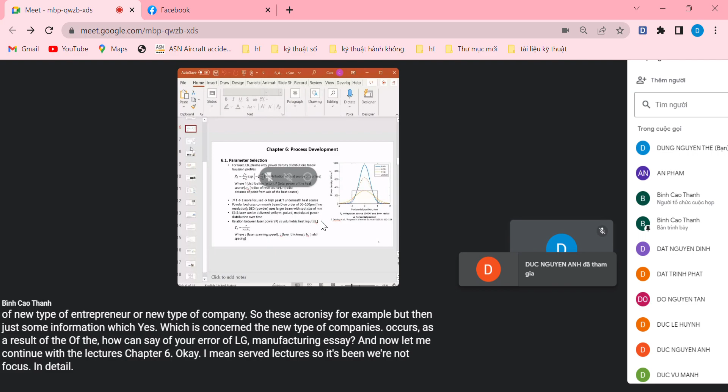Now let me continue with the lectures, chapter 6. I will serve the lecture, so I will not focus in detail. Rather, I will tell you how to investigate the lectures in the most effective way, let's say.

As I remember, last time we stopped more or less here, where we have to consider parameter selection. For example, several parameters associated with the scanning process, like scanning velocity, hatch distance, laser scanning pattern, and layer thickness, among others.

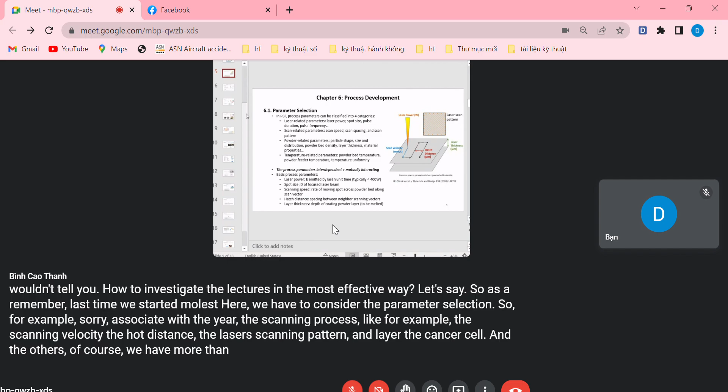Of course, we have more than 180 parameters that need to be considered during the additive manufacturing process. However, among them, the important ones are laser power, spot size, scanning speed, hatch distance, and I would say the most important is layer thickness.

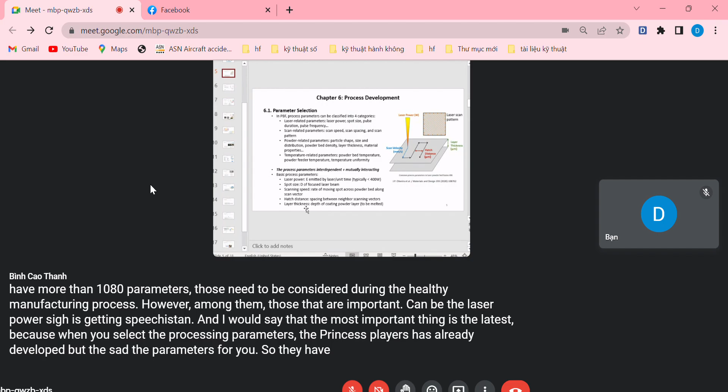Because practically, when you select the processing parameters, the printer suppliers have already developed a set of parameters for you - somehow optimized parameters - and these are defined based on the layer thickness. Unless you want to investigate the set of parameters on your own, it's better to refer to the set suggested by the manufacturer or printer suppliers, which are referenced to the layer thickness.

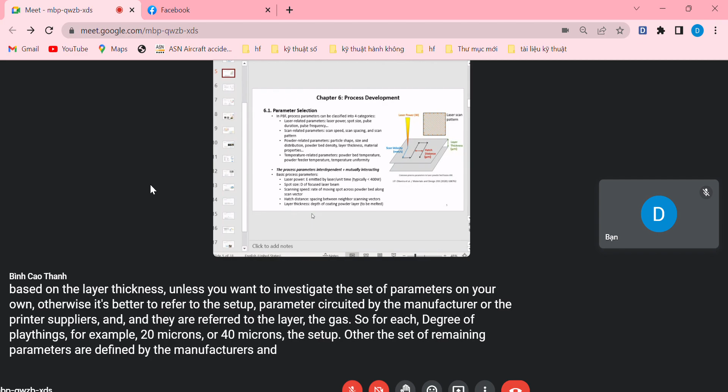So for each degree of layer thickness, for example 20 microns or 40 microns, the set of remaining parameters are defined by the manufacturers, and you should refer to these rather than developing your own, because it's a matter of time, cost, and effort for the researchers and the company as well.

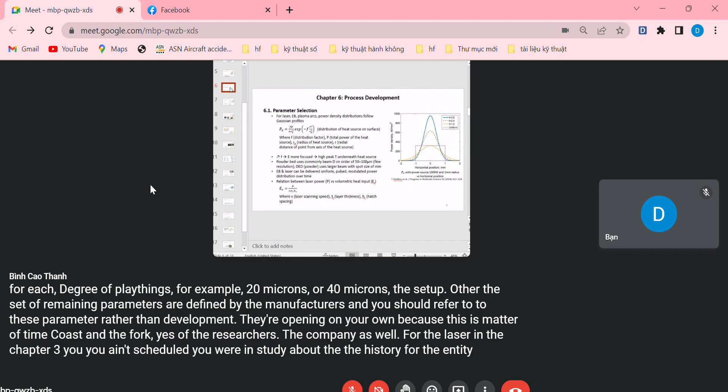For the laser, in chapter 3 you were introduced to the heat source for additive manufacturing, especially needed when you use direct energy deposition or powder bed fusion, where you use the laser, electron beam, or plasma arc as heat sources. You have the equation, and I believe we also investigated the equation to a certain extent.

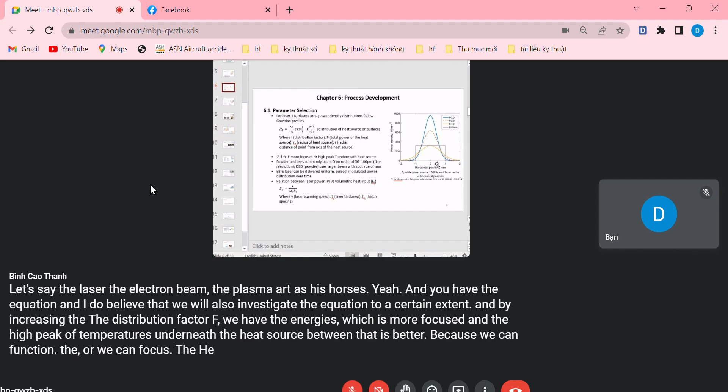By increasing the distribution factor F, we have energy that is more focused with a high peak of temperature underneath the heat source. This is better because we can concentrate or focus the heat source to a small spot size and heat up the material to the molten state, giving us the molten pool.

But if the energy is transferred to the materials insufficiently, in that case you will have some type of defect, which will be mentioned in the next few slides.

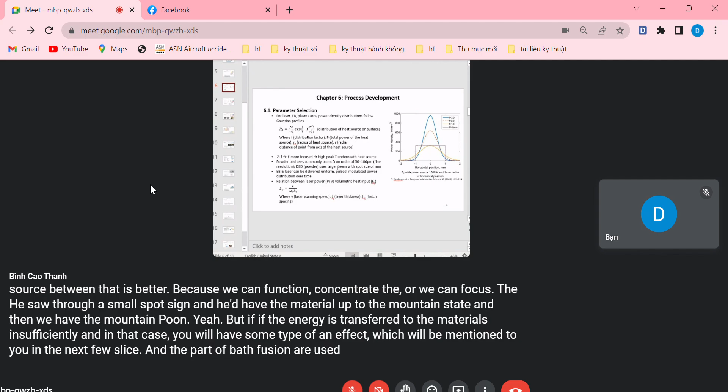Powder bed fusion uses a common beam diameter on the order of 50 to 100 microns - this is considered fine resolution. Direct energy deposition uses a larger beam, so it's faster, but with a faster process you would have poorer quality, at least referring to surface roughness.

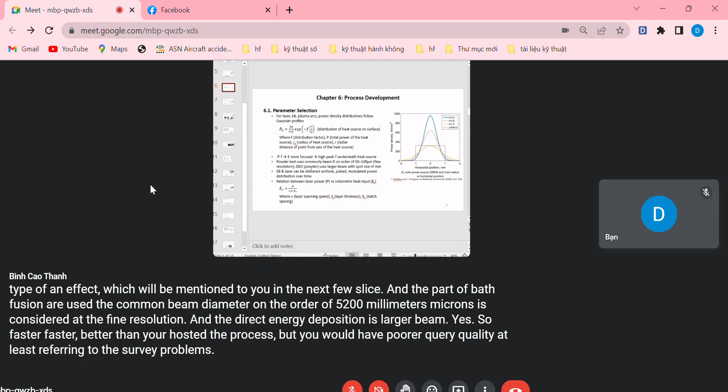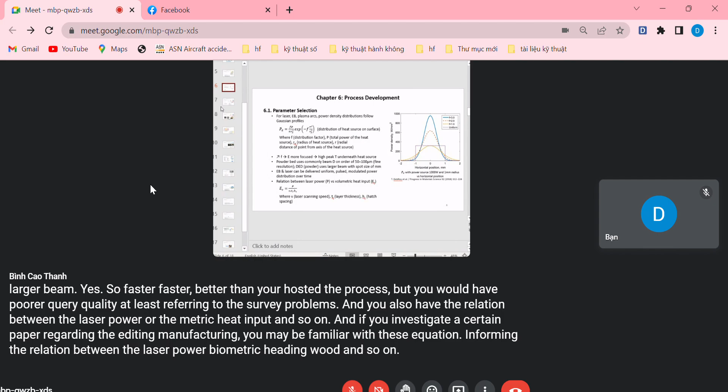You also have the relation between the laser power, volumetric heat input, and so on. If you investigate a certain paper regarding additive manufacturing, you may be familiar with this equation informing the relation between the laser power, volumetric heat input, and so on. It can help you somewhat in understanding the appropriate parameter selections.

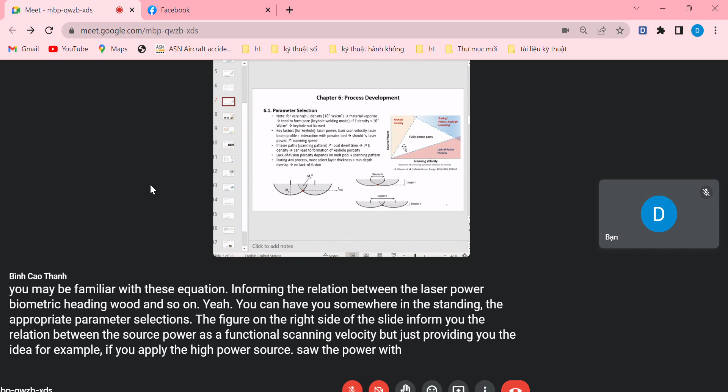The figure on the right side of the slide informs you of the relation between the source power as a function of scanning velocity, just providing you the idea of, for example, if you apply a high power source with low scanning velocity, what type of effect you would expect to have. So for sure, you need an appropriate combination of the source power and the scanning velocity in order to receive a fully dense parts. That's what we would like to have and to do.

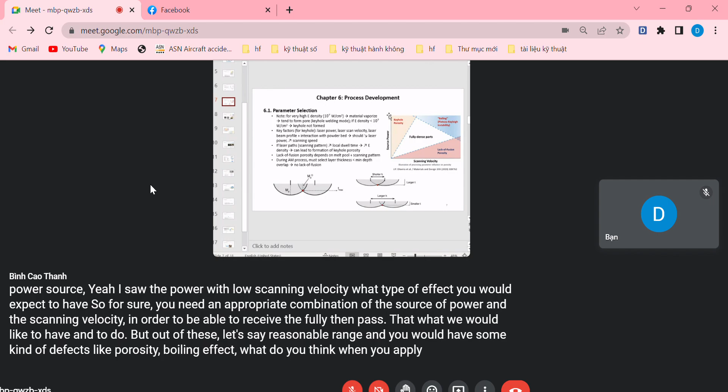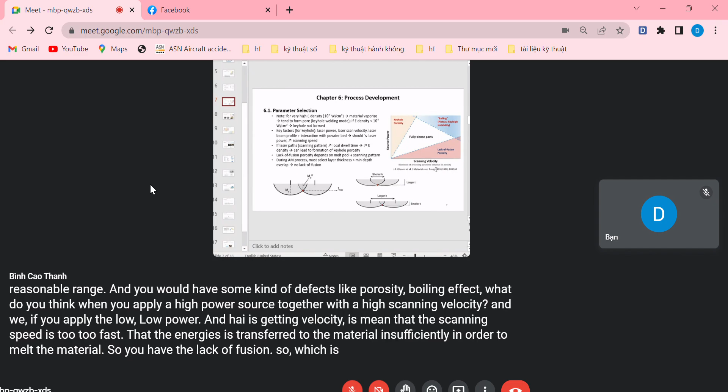But outside this reasonable range, you would have some kind of defects like porosity, balling effect. Balling effect occurs when you apply a high power source together with a high scanning velocity. And if you apply low power and high scanning velocity, it means that the scanning speed is too fast, so that energy is transferred to the material insufficiently to melt it. So you have lack of fusion, which is fused not enough, and you have a lot of porosity between the powders.

The powders do not melt completely. Imagine that the powders are in a spherical shape, and even when you pack them together, there is certain porosity between powder surfaces, and other porosities as well.

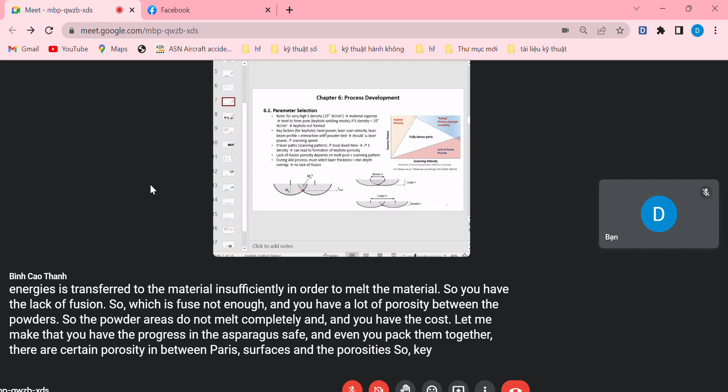Key factors you need to pay attention to: the laser power, laser scanning velocity, the laser beam profile, and of course the intrinsic properties of the material as well. This means the interaction between the heat source and the powder bed.

So basically you should reduce the laser power and increase the scanning speed. Should, but it depends on the situation.

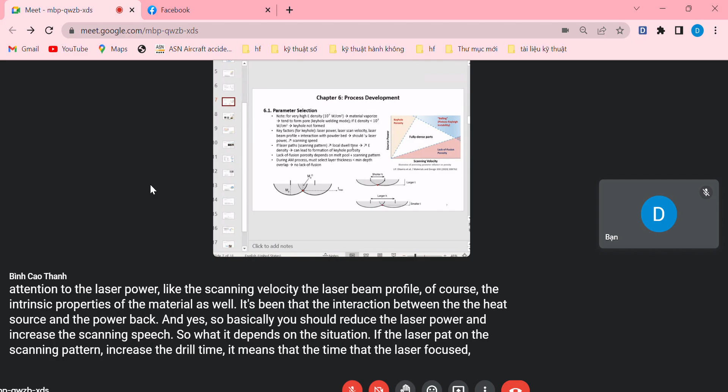If the laser path on the scanning pattern increases the dwell time - meaning the time that the laser focuses on a certain area of the powder bed - this means you increase the energy density, which can lead to the formation of keyhole porosity. This happens because high enough energy is provided to the powders, and you may have some kind of material evaporation or gas pressure, which induces the keyhole effect at this position.

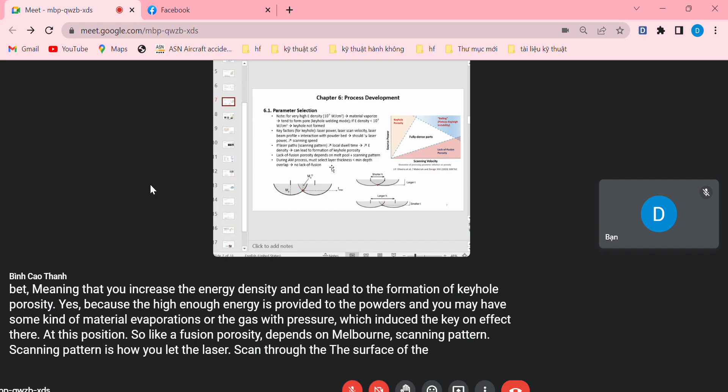Lack of fusion porosity also depends on the scanning pattern. Scanning pattern is how you let the laser scan through the surface of the powder bed - it can be unidirectional, zigzag, zigzag, zigzag, and so on, and islands.

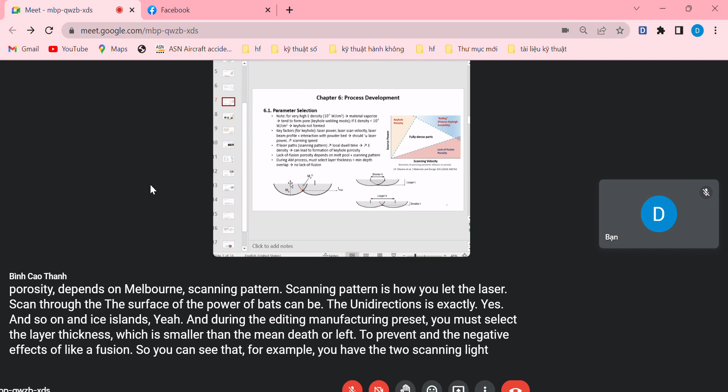During the additive manufacturing process, you must select a layer thickness smaller than the min depth overlap to prevent the negative effects of lack of fusion. For example, you have two scanning lines, and if you look at the surface, the centers of the curve represent the position where the spot size goes through, and the curve represents the boundary of the region, showing the heat affected zone.

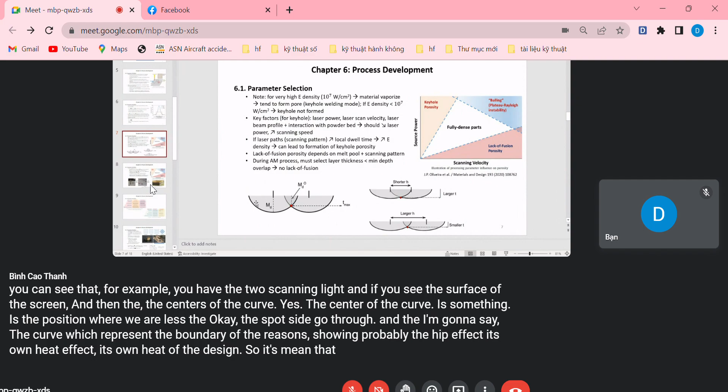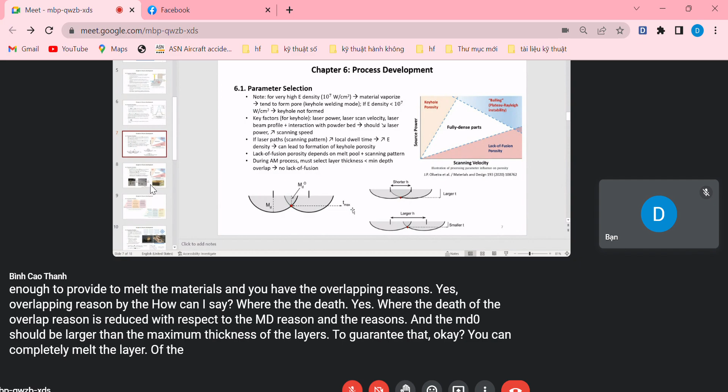Within the gray color regions, the heat will be enough to melt the materials, and you have overlapping regions - where the depth of the overlap region is reduced with respect to the MD regions. The MD0 should be larger than the maximum thickness of the layers to guarantee that you can completely melt the layer of powders, and provide enough heat to connect the new layer with the previous layers. This is very important.

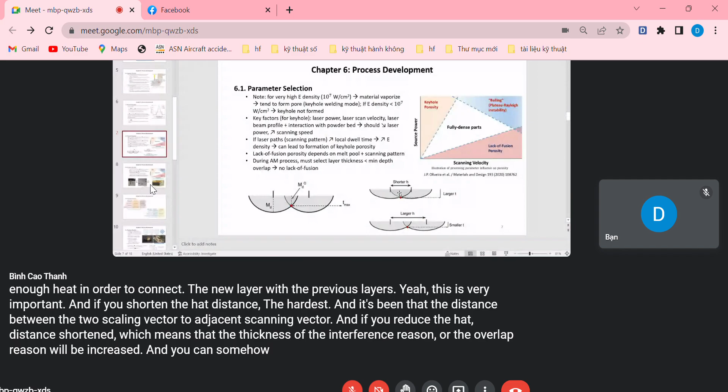If you shorten the hatch distance - the distance between two adjacent scanning vectors - and reduce it, the thickness of the interference or overlap region will increase, and you can fabricate the material with larger thickness. Conversely, when you enhance the hatch distance, reducing the thickness of the overlap region, you can fabricate the part with smaller thickness.

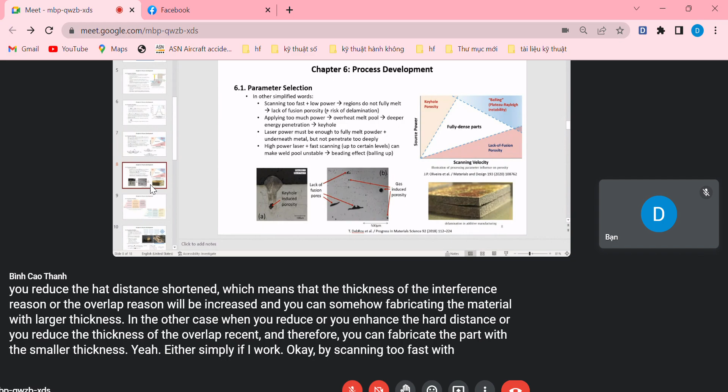In other simplified words: by scanning too fast with low power, you provide not enough energy to fully melt the materials, resulting in lack of fusion. Lack of fusion means that in one layer, the material does not melt completely, and therefore we have not enough energy to bond different layers together, which risks delamination. Delamination means layer on top of another layer - you must have good bonding between layers, but since the energy provided to wet the layer is not enough, you have the risk of delamination.

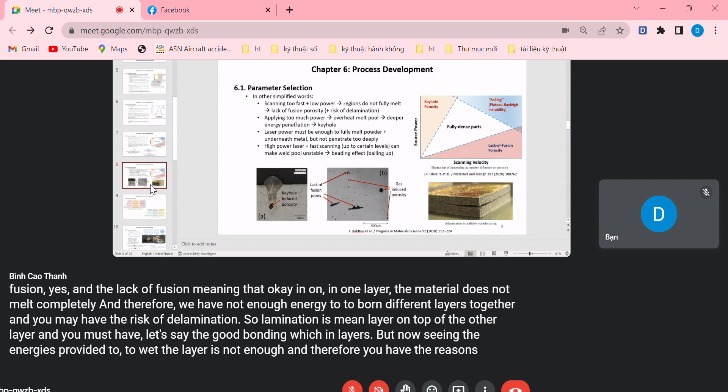However, if you apply too much power, you can overheat the melt pool. With deeper energy penetration, the energy goes deeper into the materials, and this may create a keyhole effect and induce a higher degree of porosity inside the material. Yeah, unfortunately.

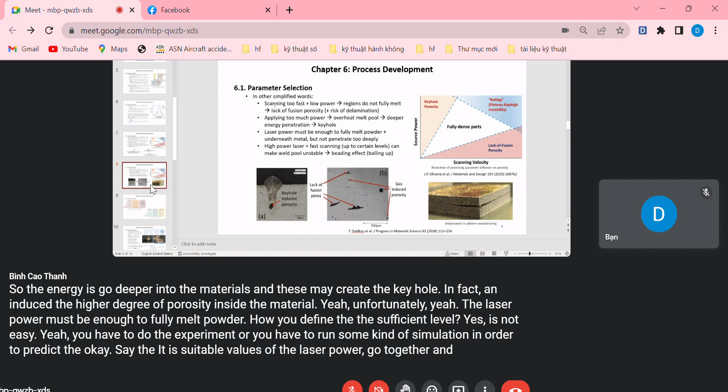The laser power must be enough to fully melt the powder. How do you define the sufficient level? It's not easy - you have to do experiments, or run some kind of simulation in order to predict the suitable values of the laser power, combined together with other parameters like the scanning speed as well.

High power laser combined with fast scanning speed, up to a certain level, can make the melt pool unstable and create a balling-up effect. So it's something like droplets standing adjacent to each other, like balls. But this is an undesired effect - we do not want to have this kind of effect.

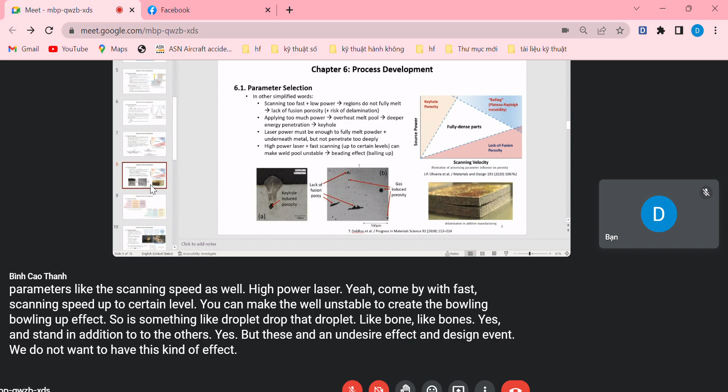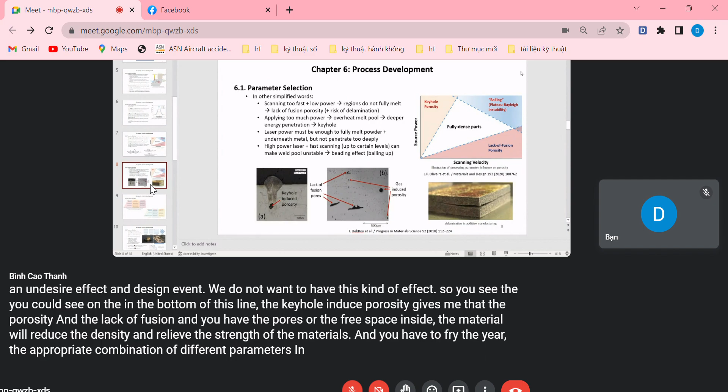You could see at the bottom of this slide the keyhole-induced porosity, which means you have porosity and lack of fusion, and pores or free space inside the material, which reduce the density and reduce the strength of the material. You have to find the appropriate combination of different parameters in order to avoid these negative effects.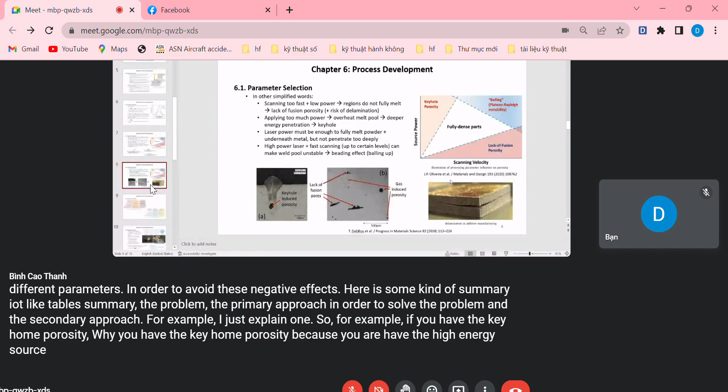Here is some kind of summary table, summarizing the problem, the primary approach to solve the problem, and the secondary approach. Let me explain one - for example, if you have keyhole porosity, why? Because you have a high energy source combined with low scanning velocity, so you can reduce the laser power. Look at the relationship between the source power and scanning velocity in order to modify the parameters. For lack of fusion, you can reduce the scan line spacing, reduce the layer thickness.

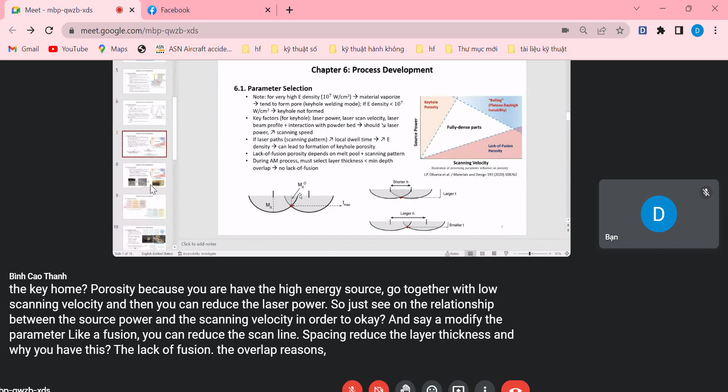And why do you have lack of fusion? Because if you see the overlap regions, the heat is not transferred enough to the material - in other words, if the melt depth is smaller than the maximum layer thickness you plan to fabricate, the energy is not enough to penetrate the whole depth of the layer of material.

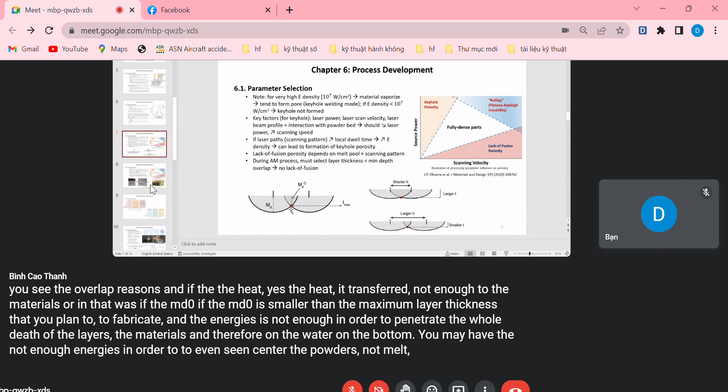So at the bottom you may have not enough energy to even sinter the powder, let alone melt it, and therefore you may have the effect of delamination. For example, at the level of Tmax, if energy is transferred to this depth, you can melt this layer and the previous layer - if not, you do not get good wetting between the two layers, and this is a problem which may lead to material delamination.

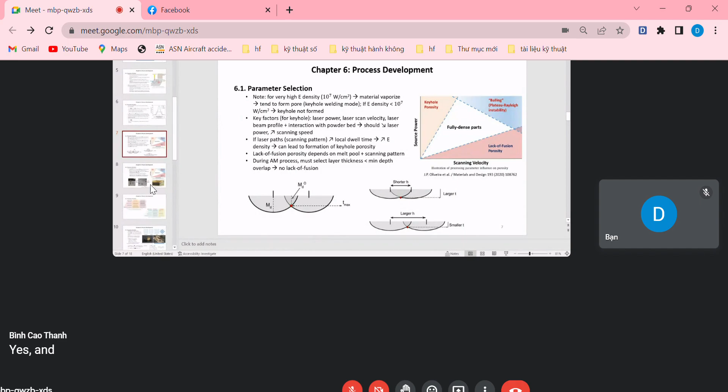I'm sorry, just a minute. Where am I?

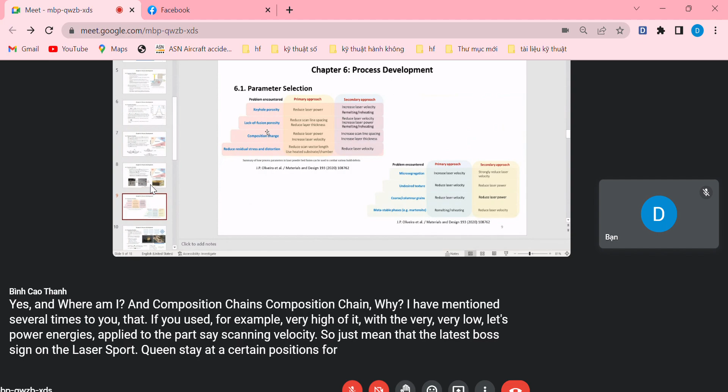And composition change - why? I have mentioned several times that if you use very high power energy applied to the powder bed with very low scanning velocity, this means the laser spot will stay at a certain position for a longer period of time, and during that time you transfer more energy than necessary to the material. The material receives more energy than expected and heats up significantly, above the evaporation temperature of low melting temperature elements, and these elements can be evaporated.

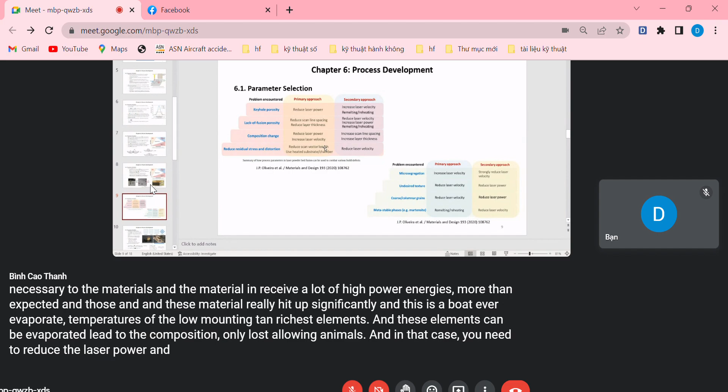This leads to composition change or loss of alloying elements. In that case, you need to reduce the laser power and increase the laser velocity in order to reduce the energy transferred to the material, and so on. This is the idea of how you can modify the parameters appropriately in order to guarantee the quality of the materials.

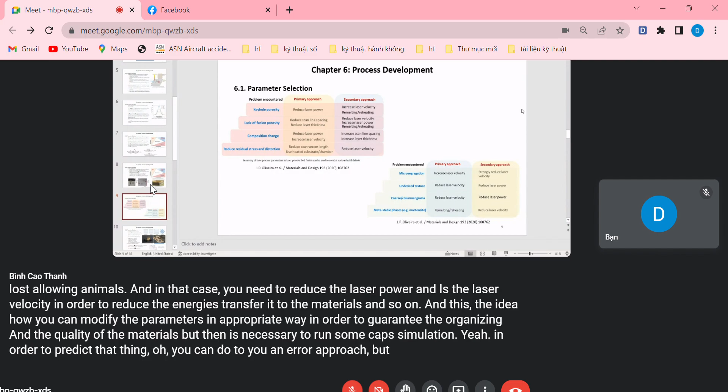But then it's necessary to run some kind of simulation in order to predict that. Or you can do a trial and error approach, but that means you waste a lot of money, time, and effort.

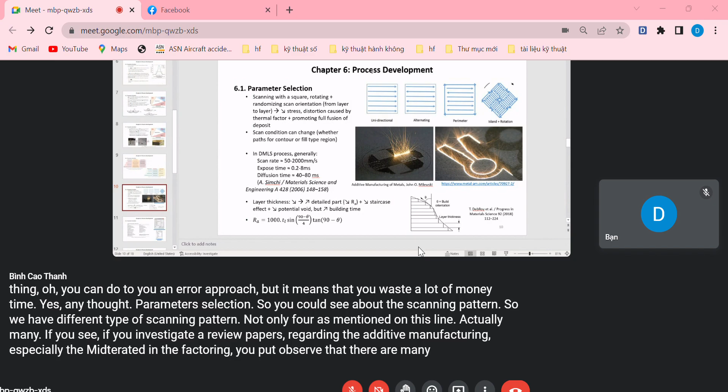Parameter selection - you could see the scanning pattern. We have different types of scanning patterns, not only four as mentioned here, actually many. If you investigate review papers regarding additive manufacturing, especially metal additive manufacturing, you could observe there are many scanning strategies used to fabricate parts additively. So far, I could say the island and rotation strategy is selected widely.

Scanning with the square rotation, randomizing the scan orientation, you can reduce the stress and distortion caused by the thermal factor, and promote full fusion of deposit. Therefore, this is preferable, to use the island rotation scanning pattern.

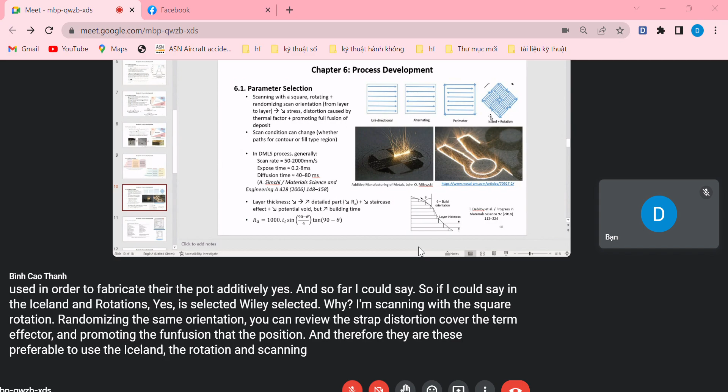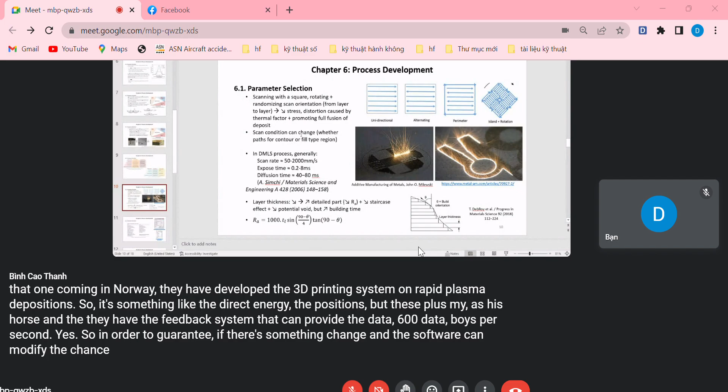The scanning condition can change, for sure. That's the reason one company in Norway developed a 3D printing system called rapid plasma deposition. It's something like direct energy deposition, but uses plasma as its source, and they have a feedback system that can provide data at 600 data points per second, so that if something changes, the software can modify or adjust the process accordingly.

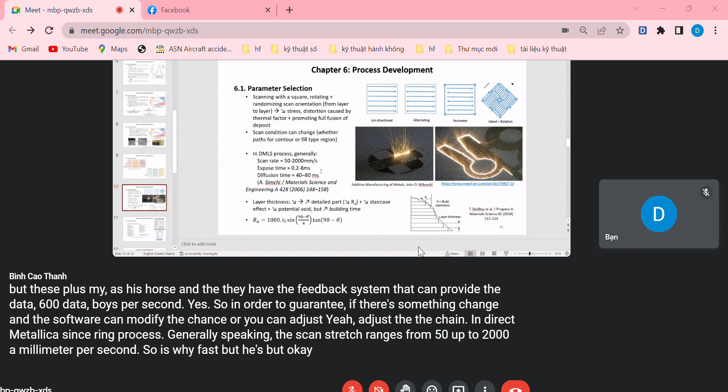In direct metal laser sintering process, generally speaking, the scan ranges from 50 up to 2000 millimeters per second. It's quite fast, but electron beam scanning can reach a faster scanning rate. The exposure time is 0.2 up to 8 milliseconds, and diffusion time is 40 to 80 milliseconds, and so on. This information is taken from the Material Science Engineering journal written by Simchi.

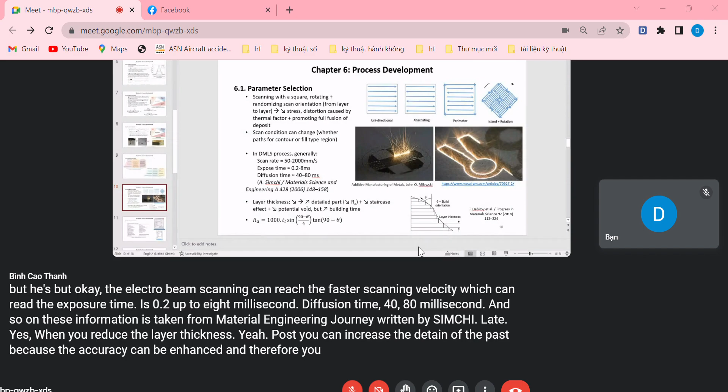Layer thickness: when you reduce the layer thickness, you can increase the detail of the parts because the accuracy can be enhanced, and therefore you enhance the quality of the surface after the sintering or melting process. In other words, you reduce the average roughness of the part. But at the same time, you have to scan or synthesize more layers of material, which means you increase the building time.

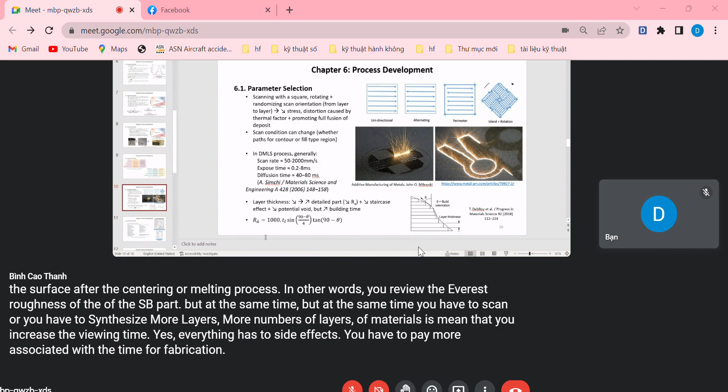Yes, everything has two side effects - you have to pay more in terms of time for fabrication. The surface roughness can be calculated based on an equation, but I will not focus on the derivation of that equation.

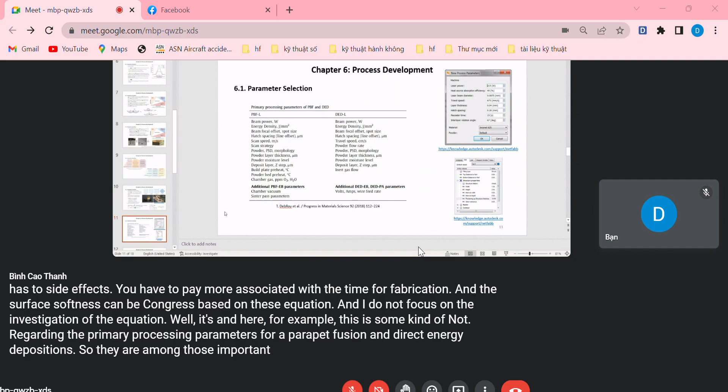Here is some notes regarding the primary processing parameters for powder bed fusion and direct energy deposition. These are among the important parameters for the fabrication process in additive manufacturing: beam power, energy density, beam focal offset or spot size, spacing, and many others.

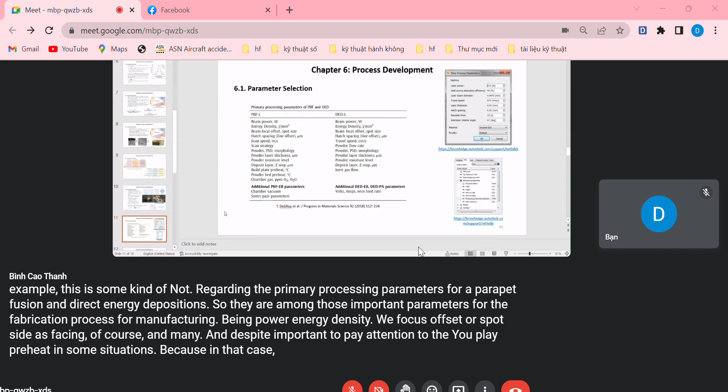It's quite important to pay attention to plate preheat in some situations, because in that case you can reduce the thermal gradient between different regions of the part and reduce the risk of distortion caused by the thermal gradient.

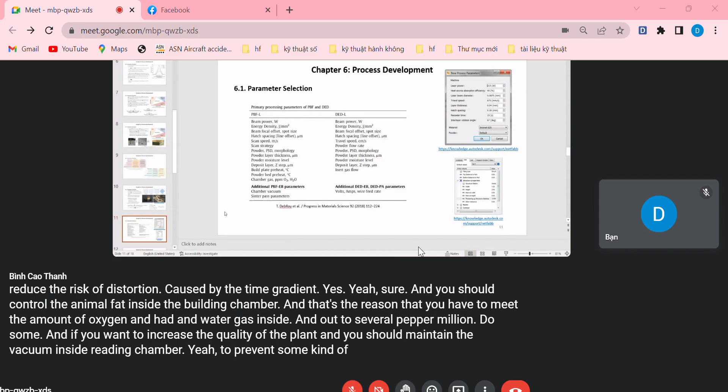You should control the atmosphere inside the building chamber, and that's the reason you have to limit the amount of oxygen and water gas inside, down to several parts per million. If you want to increase the quality of the part, you should maintain a vacuum inside the building chamber to prevent unnecessary reactions between the material and the gas at high temperatures under the influence of the laser source, electron beam source, or other high energy sources.

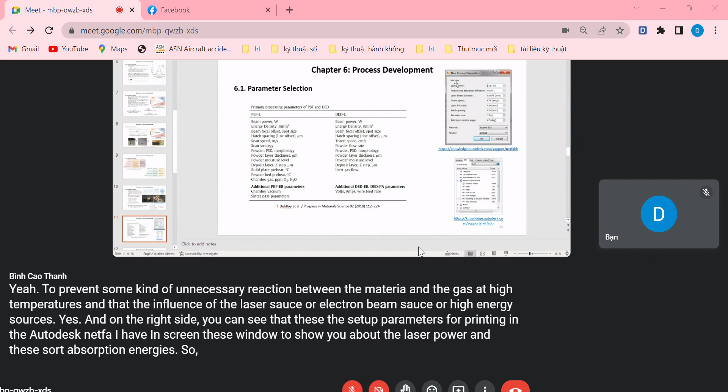On the right side you can see the setup parameters for printing in Autodesk Netfabb. I've taken a screenshot of this window to show you the laser power and heat source absorption efficiency. For example, for aluminum or inconel, you have a certain amount of energy reflection, based on the intrinsic properties of the material.

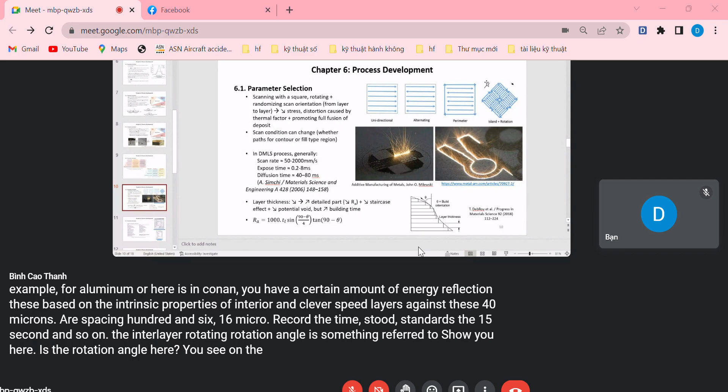The interlayer rotation angle is something I'll show you here - this is the rotation angle. You'll see on the top right of the slide where you print the material, scanning the laser for each island. Once you finish one layer, on the next layer you rotate, let's say 67 degrees with respect to the previous layer.

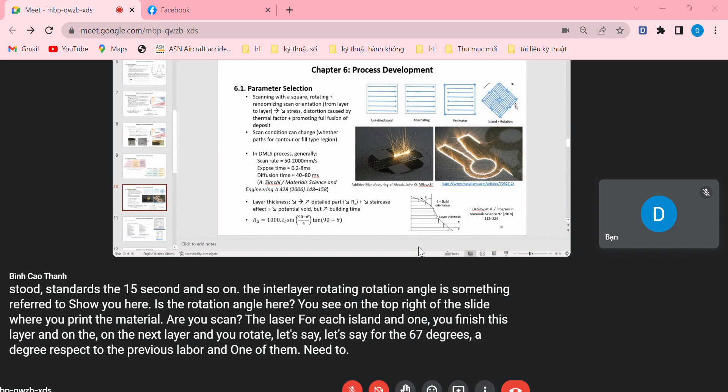The aim is to minimize negative effects regarding, for example, the lack of fusion, and to reduce porosity, increasing the bonding between the layers.

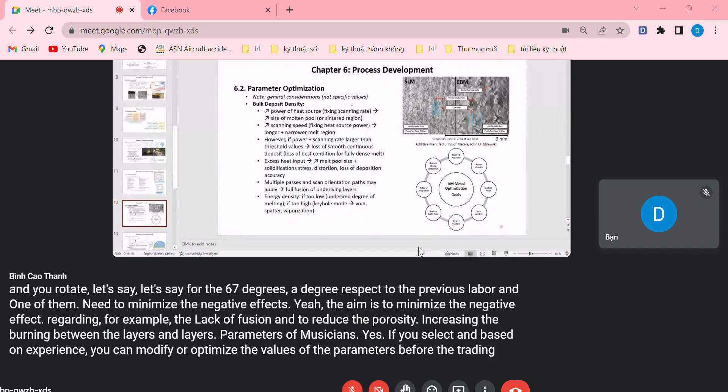Parameter optimization: based on experience, you can modify or optimize the values of the parameters before the 3D printing process. But it depends - there's no information regarding specific values here because this information is confidential. I'll just provide some general considerations.

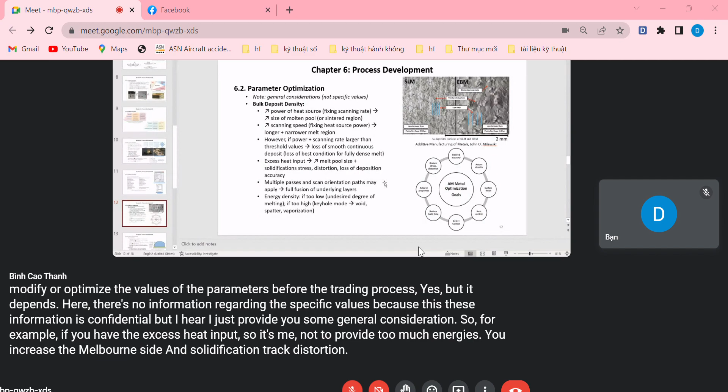For example, if you have excess heat input, meaning you provide too much energy, you increase the melt pool size and solidification stress distortion, and you may have the negative effect of material evaporation for elements with low melting temperatures. Therefore you may have loss of deposition accuracy, because the material evaporates, and the effect is something like spatter, which negatively affects the accuracy of the part for sure.

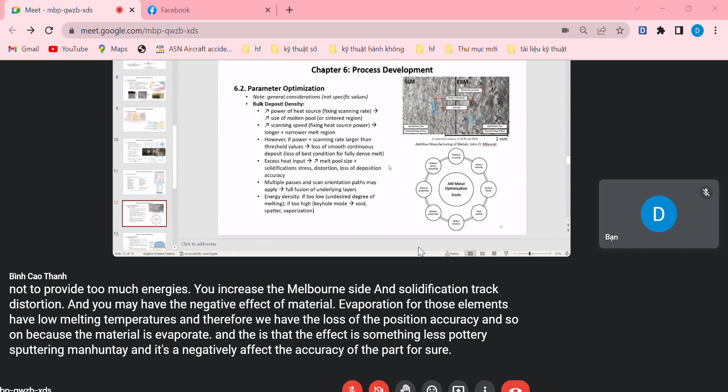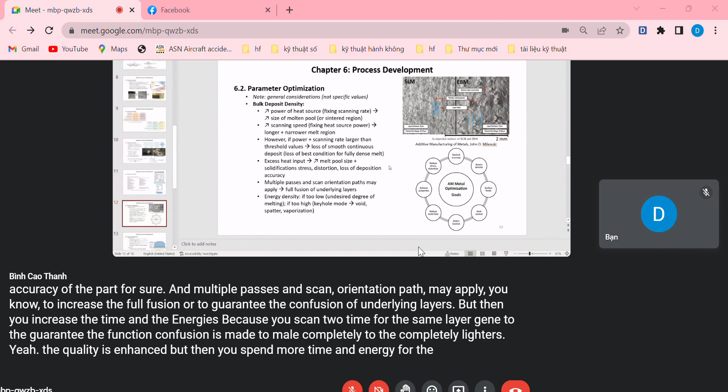Multiple passes and scan orientation paths may apply to increase or guarantee the full fusion of underlying layers. But then you're increasing the time and energy because you scan multiple times for the same layer to guarantee full fusion, which means you increase the cost.

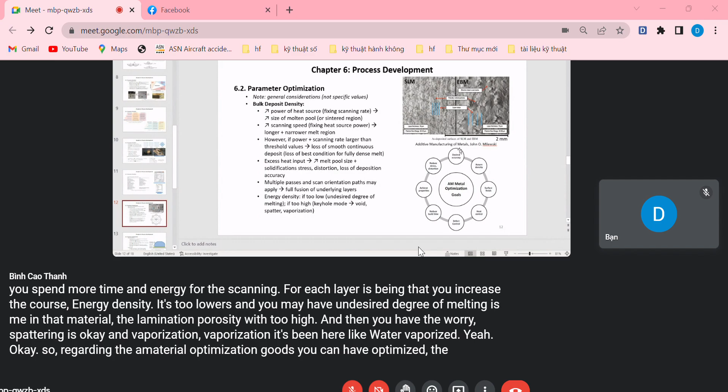Regarding AM material optimization goals, you can optimize for design accuracy, density—if possible 100% relative density—good surface finish, and heat control. This means low thermal gradient between different regions to reduce stress, distortion, or crack risk after the process.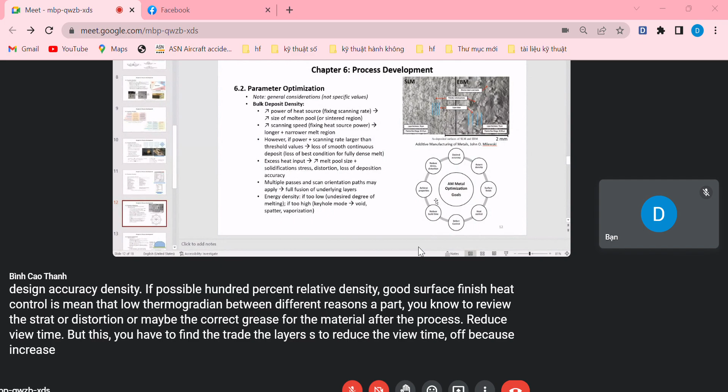Reduce build time, but you have to find the trade-off, because increasing layer thickness to reduce build time means you get a larger staircase effect. Then you have to apply post machining process to make the surface smoother, like milling to cut the residual powder on the surface.

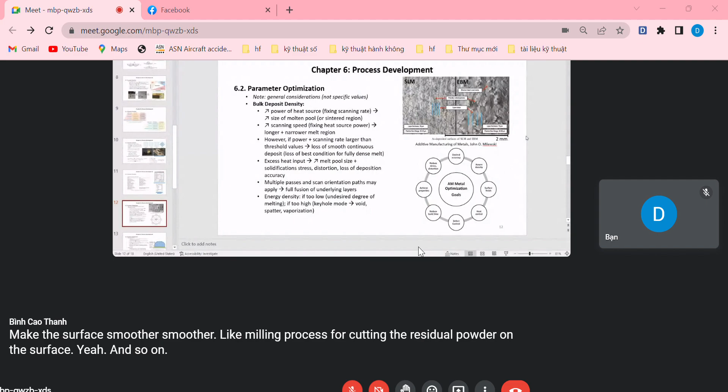And if you want to modify the properties, you may need to apply heat treatment in order to achieve the desired properties when necessary.

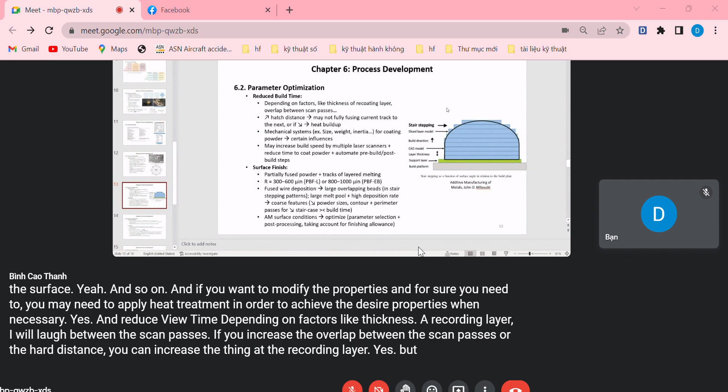Reduce build time depends on factors like thickness of recoating layer, overlap between the scan passes. If you increase the overlap between scan passes or the hatch distance, you can increase the thickness of the recoating layer, but pay attention to the staircase effect. If you want a smooth surface like the black curve, you have to apply post machining to eliminate residual materials after the sintering or melting process.

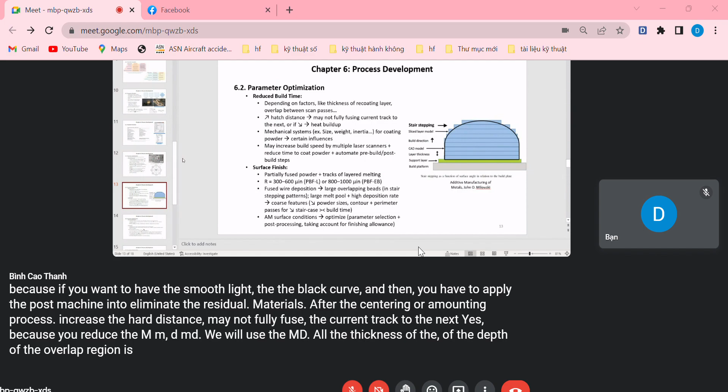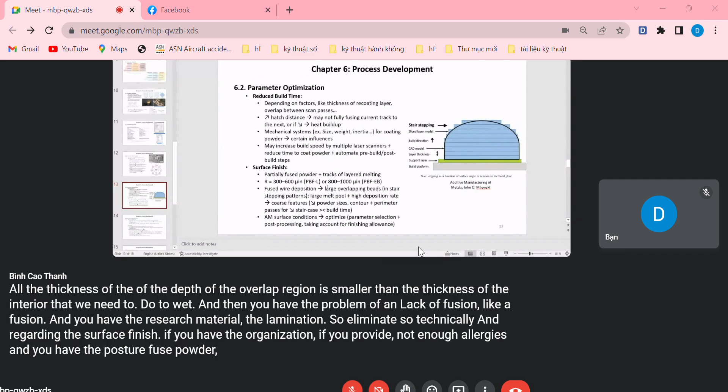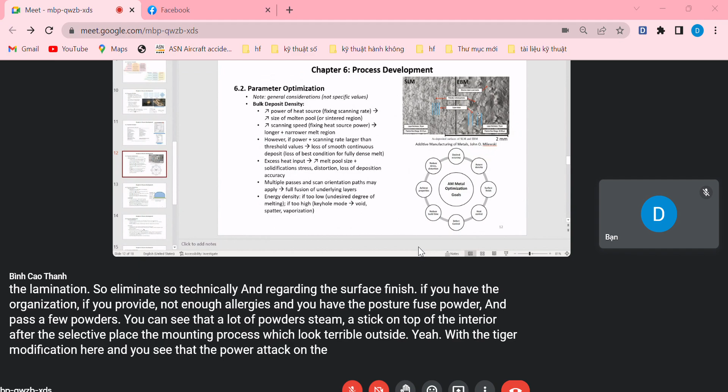Regarding surface finish, if you don't provide enough energy, you have partially fused powder, and you can see that a lot of powder still sticks on top of the material after the selective laser melting process, which looks terrible. With high magnification here, you can see the powder stuck on the top of the surface.

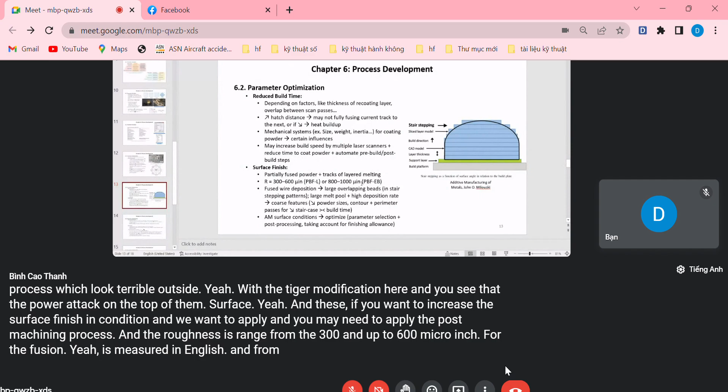If you want to increase the surface finishing condition, you may need to apply post machining process. The roughness ranges from 300 up to 600 micro inches for powder bed fusion, measured in inches, and from 800 up to 1000 micro inches for powder bed fusion using electron beam as heat source.

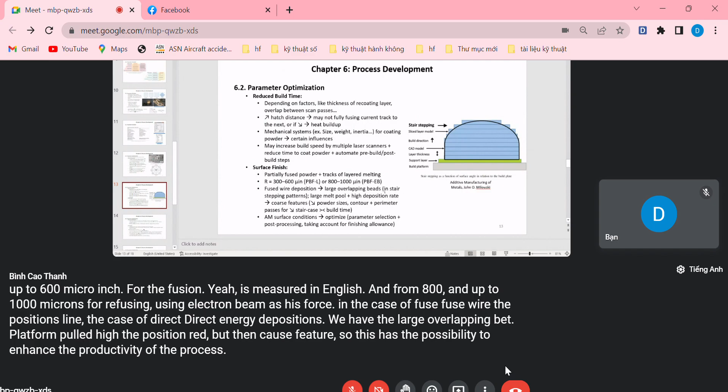In the case of fused wire deposition, like in direct energy deposition, we have large overlapping bead, large melt pool, high deposition rate, but then coarse features. This has the possibility to enhance productivity of the process, but then you have coarse features, meaning it's quite difficult to fabricate the part accurately. You have to apply additional steps to fabricate the part in finer dimensions.

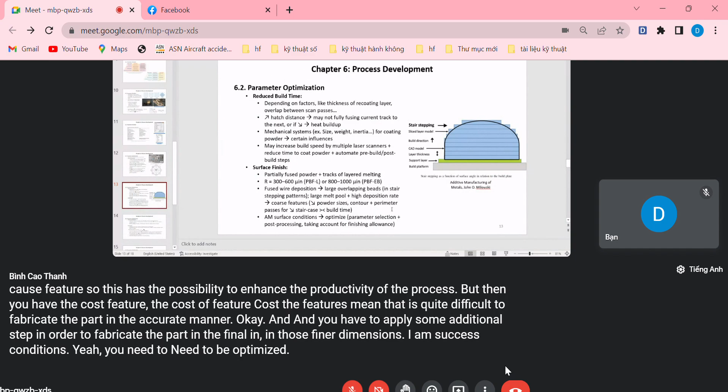AM surface conditions need to be optimized. You need to select appropriate parameters, combine with suitable post-processing steps, and you may need to consider the finishing allowance. This means you need to add more material than necessary, not too much, but enough for the post-processing step.

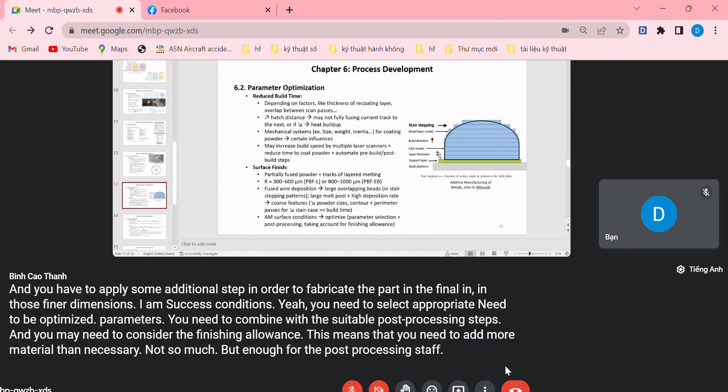After 3D printing, you can cut a small layer of material to increase the surface quality or reduce the surface roughness.

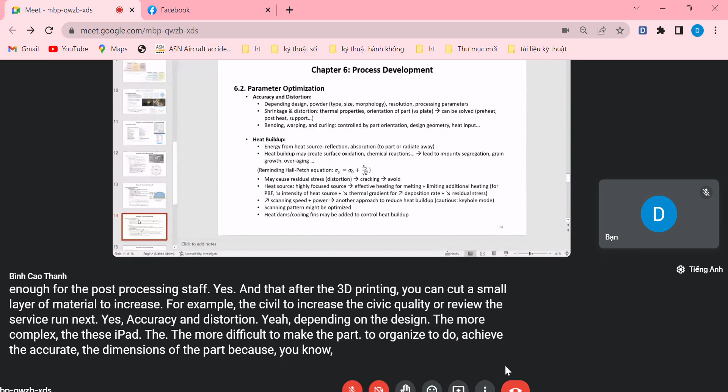Accuracy and distortion depend on the design—the more complex the design part, the more difficult to achieve accurate dimensions, because additive manufacturing has its own limitations regarding accuracy compared to traditional manufacturing processes like lathe cutting, drilling, and others.

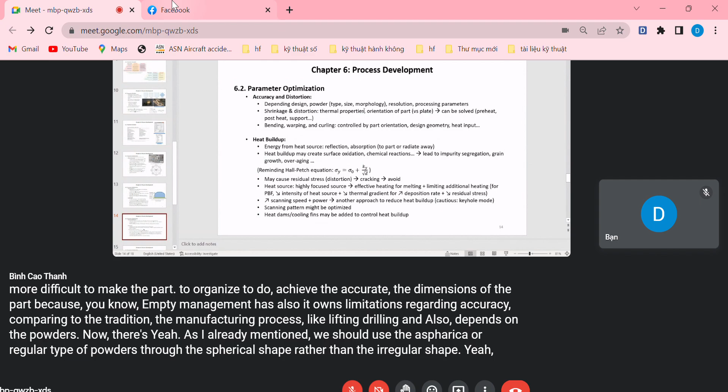It also depends on the powders—as I already mentioned, we should use spherical or regular type powders rather than irregular shapes. The processing parameters are also important. Shrinkage and distortion depend on the thermal property of the material and the orientation of the part with respect to the plate, because it strongly depends on how...